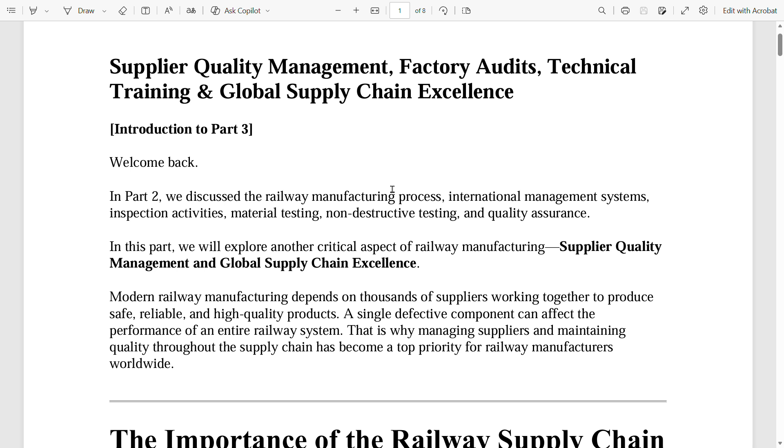Welcome back. In part 2, we discussed the railway manufacturing process, international management systems, inspection activities, material testing, NDT, and quality assurance. In this part, we will explore another critical aspect of railway manufacturing: supplier quality management and global supply chain excellence.

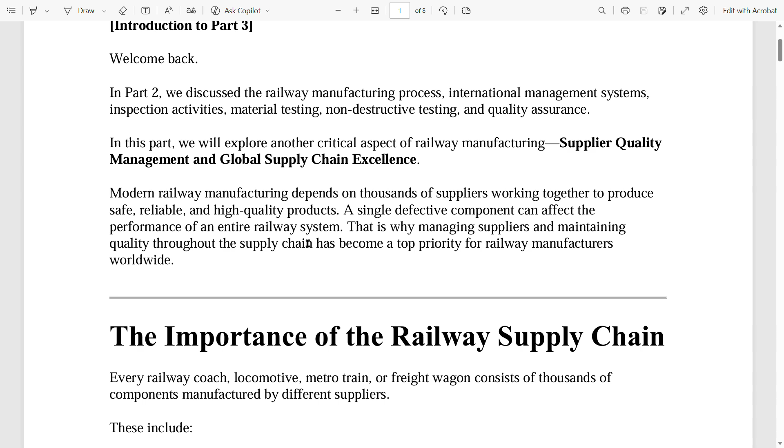Modern railway manufacturing depends on thousands of suppliers working together to produce safe, reliable, and high quality products. A single defective component can affect the performance of an entire railway system. That is why managing suppliers and maintaining quality through the supply chain has become a top priority for railway manufacturers worldwide.

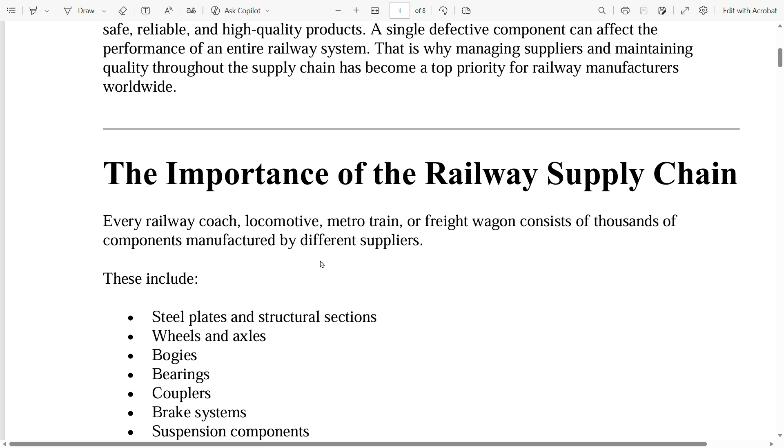The importance of the railway supply chain. Every railway coach, locomotive, metro train, or freight wagon consists of thousands of components manufactured by different suppliers.

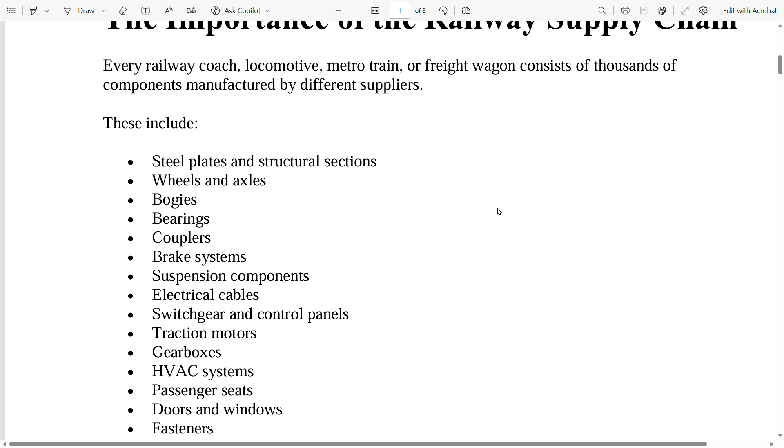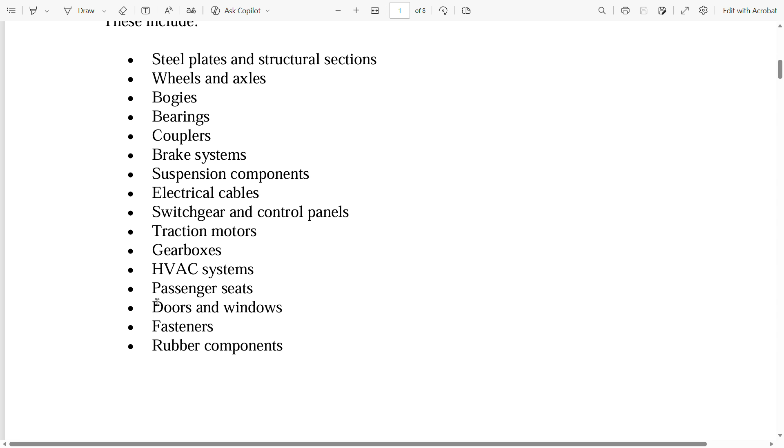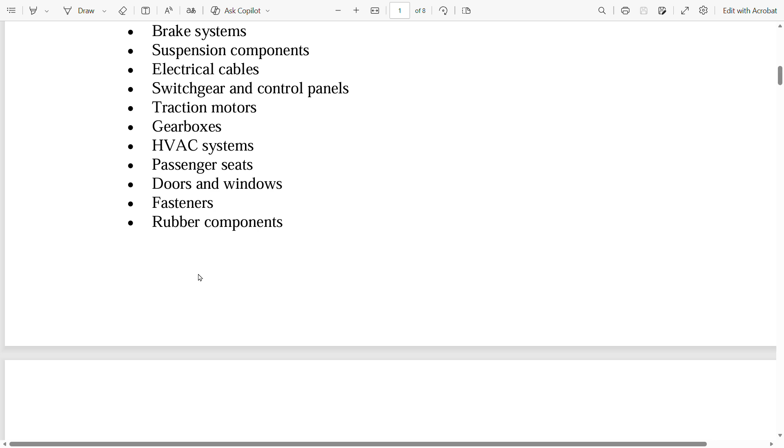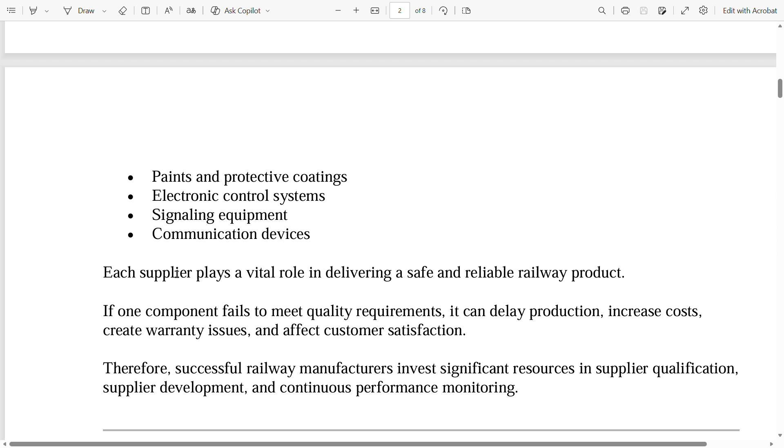These include steel plates and structural sections, wheels and axles, bogies, bearings, couplers, brake systems, suspension components, electrical cables, switch gear and control panels, traction motors, gearboxes, HVAC systems, passenger seats, doors and windows, fasteners, rubber components, paints and protective coatings, electronic control systems, signaling equipment, and communication devices. Each supplier plays a vital role in delivering a safe and reliable railway product.

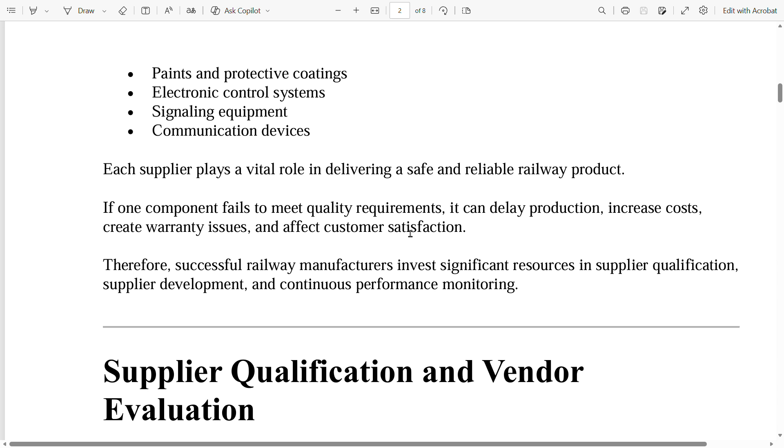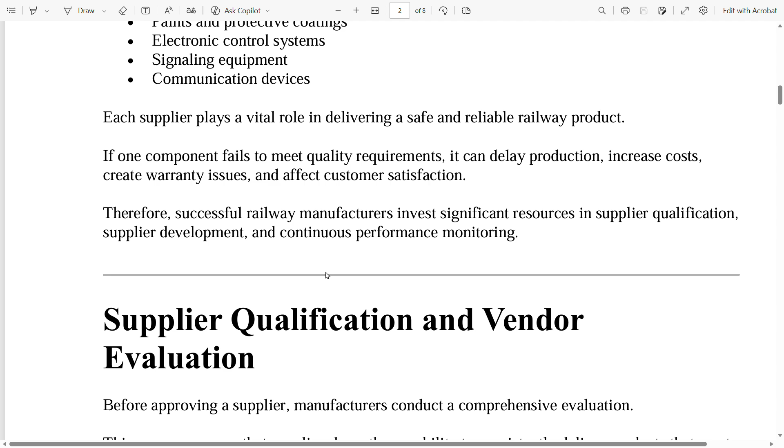If one component fails to meet quality requirements, it can delay production, increase costs, create warranty issues, and affect customer satisfaction. Therefore, successful railway manufacturers invest significant resources in supplier qualification, supplier development, and continuous performance monitoring.

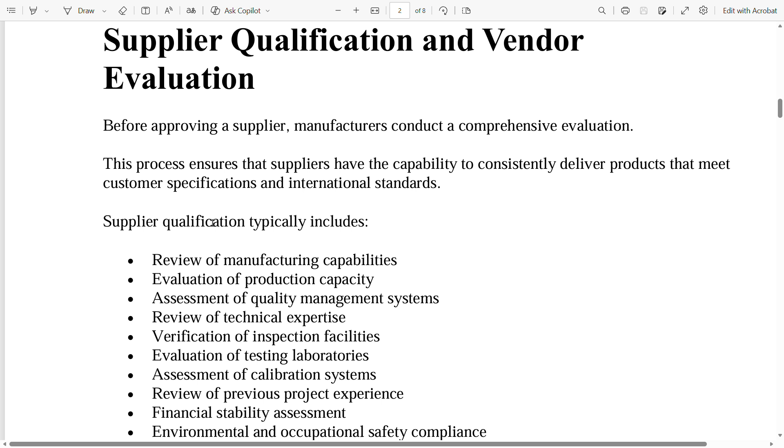Supplier qualification and vendor evaluation. Before approving a supplier, manufacturers conduct a comprehensive evaluation. This process ensures that suppliers have the ability to consistently deliver products that meet customer specifications and international standards.

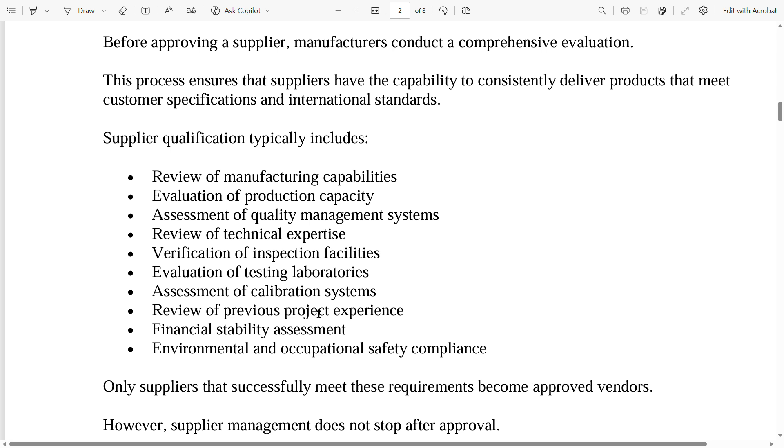Supplier qualification typically includes review of manufacturing capabilities, evaluation of production capacity, assessment of quality management systems, review of technical expertise, verification of inspection facilities, evaluation of testing laboratories, assessment of calibration systems, review of previous project experience, financial stability assessment, and environmental and occupational safety compliance.

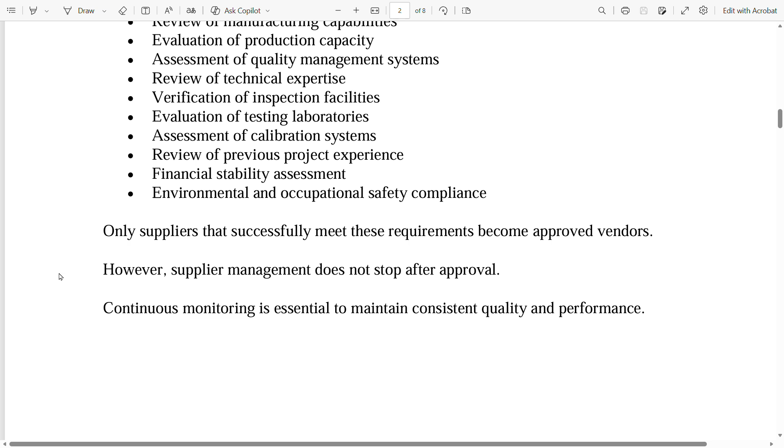Only suppliers that successfully meet these requirements become approved vendors. However, supplier management does not stop after approval. Continuous monitoring is essential to maintain consistent quality and performance.

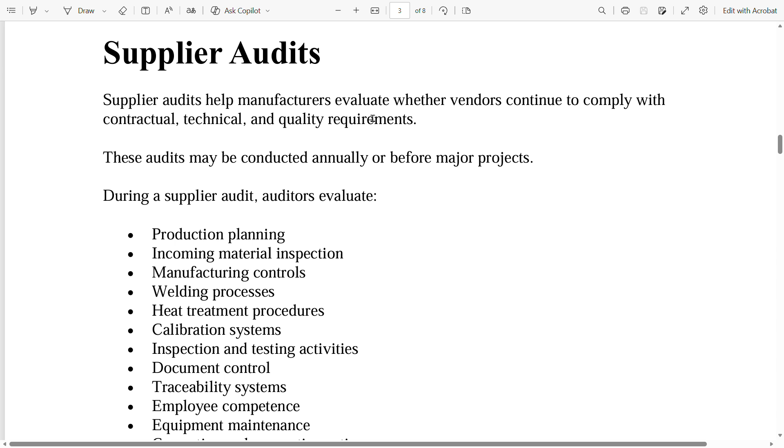Supplier audits help manufacturers evaluate whether vendors continue to comply with contractual, technical, and quality requirements. These audits may be conducted annually or before major projects.

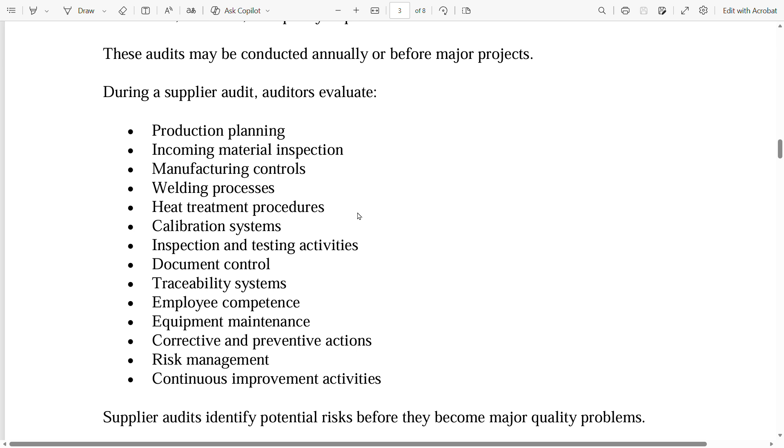During a supplier audit, auditors evaluate production planning, incoming material inspection, manufacturing controls, welding process, heat treatment procedures, calibration systems, inspection and testing activities, document control, traceability systems, employee competence, equipment maintenance, corrective and preventive actions, risk management, and continuous improvement activities.

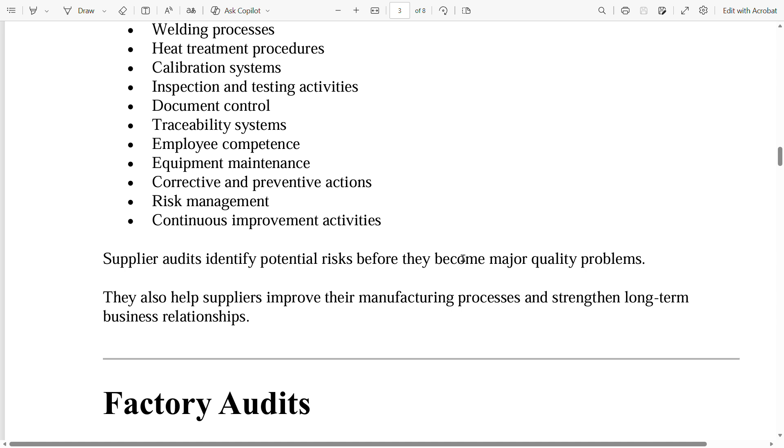Supplier audits identify potential risks before they become major quality problems. They also help suppliers improve their manufacturing processes and strengthen long-term business relationships.

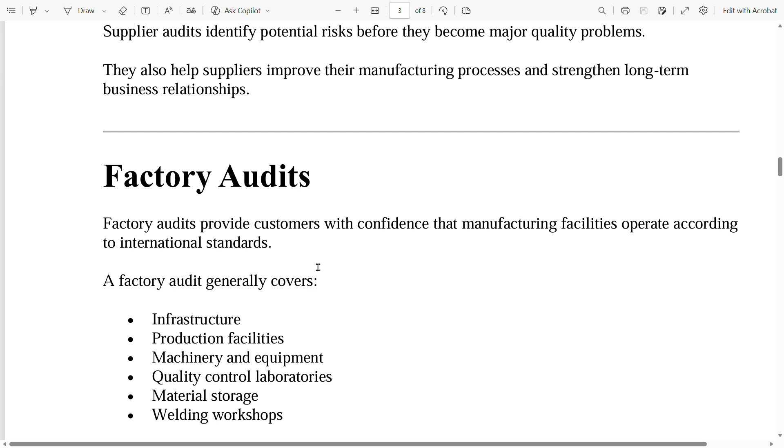Factory audits provide customers with confidence that manufacturing facilities operate according to international standards. A factory audit generally covers infrastructure,

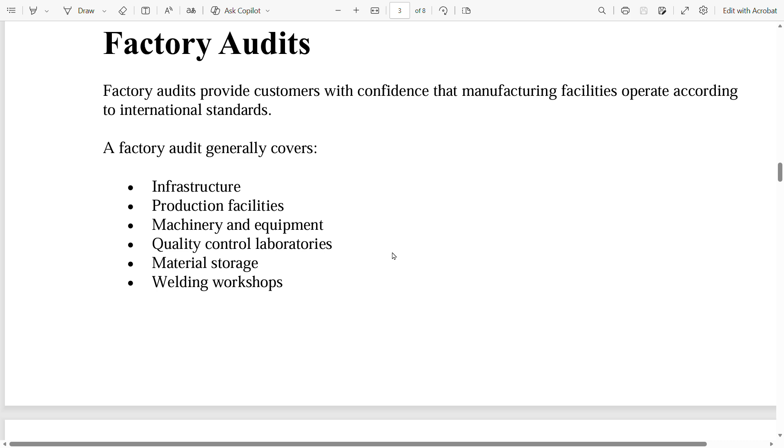production facilities, machinery and equipment, quality control laboratories, material storage, welding workshops, assembly lines, environmental controls, occupational health and safety, inspection equipment, calibration systems, documentation, and production records. Factory audits help identify opportunities for operational improvement while ensuring compliance with customer expectations.

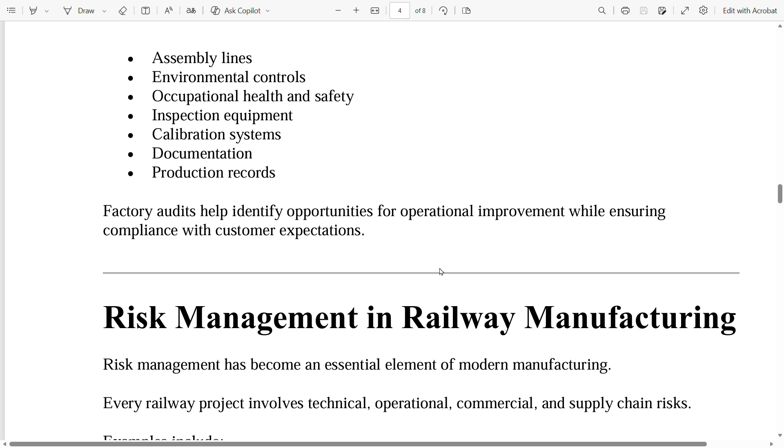Risk management in railway manufacturing. Risk management has become an essential element of modern manufacturing. Every railway project involves technical, operational, commercial, and supply chain risks.

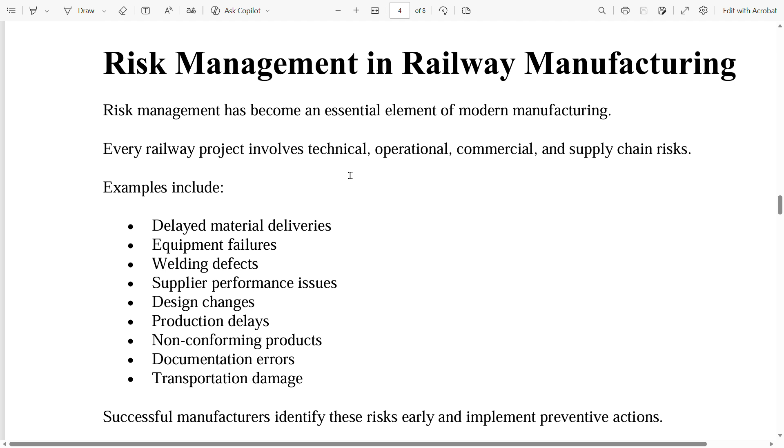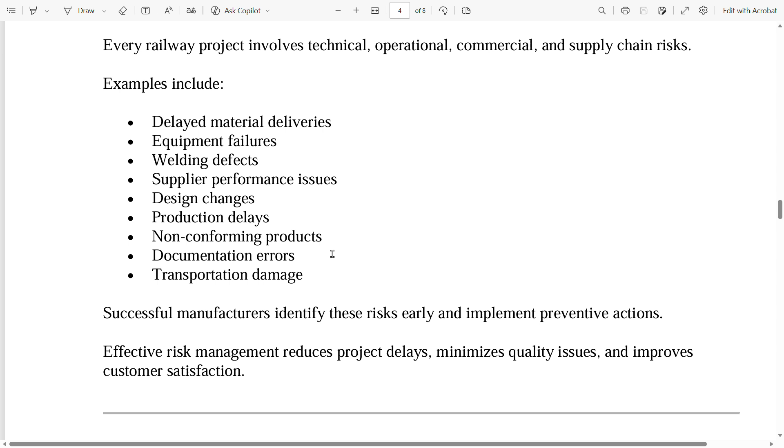Examples include delayed material deliveries, equipment failures, welding defects, supplier performance issues, design changes, production delays, non-conforming products, documentation errors, and transportation damage. Successful manufacturers identify these risks early and implement preventive actions. Effective risk management reduces project delays, minimizes quality issues, and improves customer satisfaction.

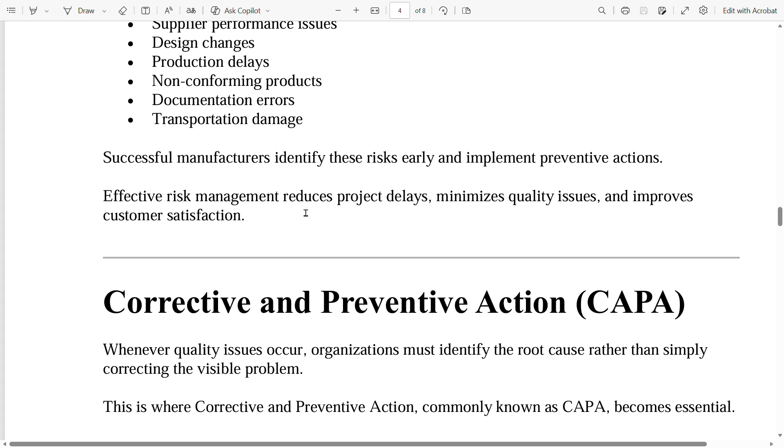Corrective and preventive action, CAPA. When quality issues occur, organizations must identify the root cause rather than simply correcting the visible problem. This is where corrective and preventive action, commonly known as CAPA, becomes essential.

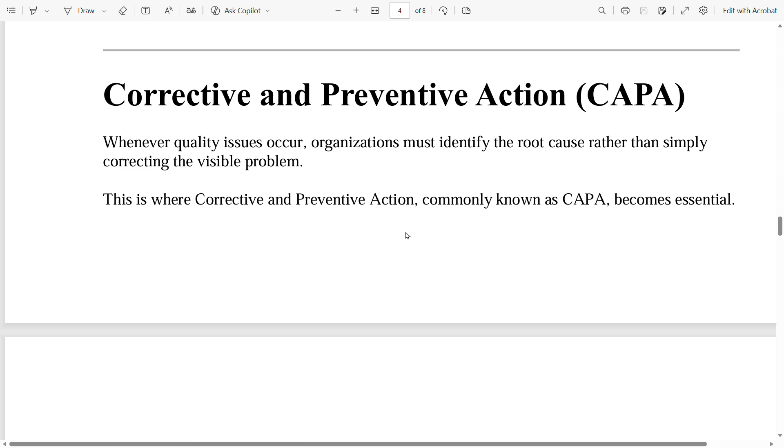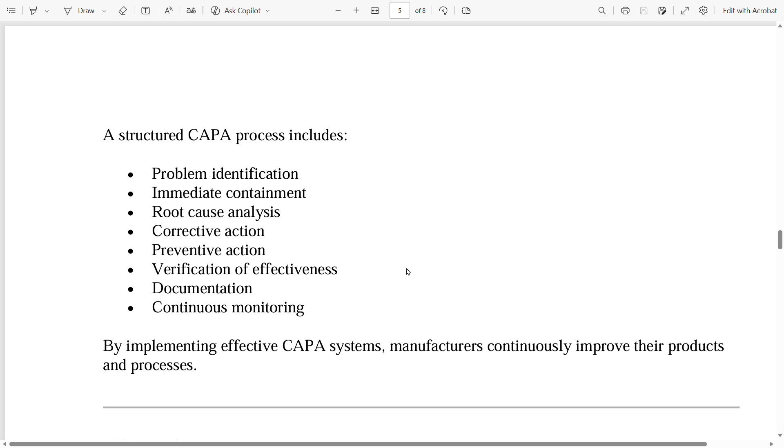A structured CAPA process includes problem identification, immediate containment, root cause analysis, corrective actions, preventive actions, verification of effectiveness, documentation, and continuous monitoring. By implementing effective CAPA systems, manufacturers continuously improve their products and processes.

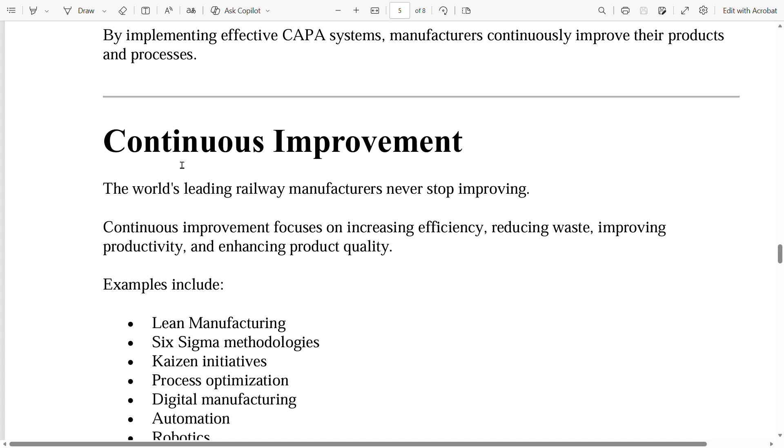Next is continuous improvement. The world's leading railway manufacturers never stop improving. Continuous improvement focuses on increasing efficiency, reducing waste, improving productivity, and enhancing product quality.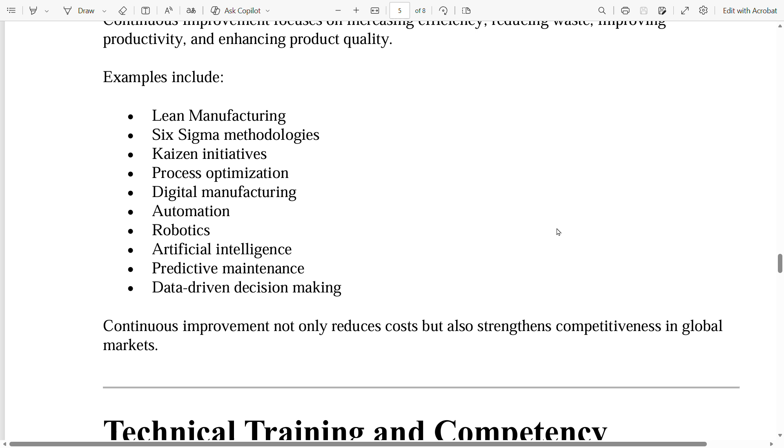Examples include lean manufacturing, Six Sigma methodologies, Kaizen initiatives, process optimization, digital manufacturing, automation, robotics, artificial intelligence, predictive maintenance, and data-driven decision making. Continuous improvement not only reduces costs but also strengthens competitiveness in global markets.

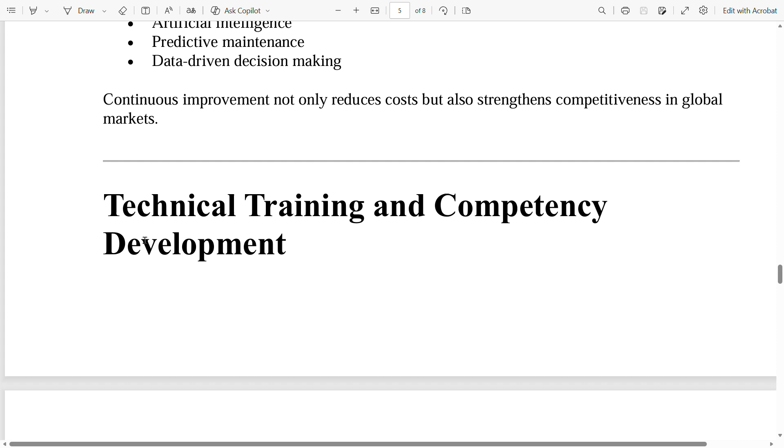Technical training and competency development. Technology in the railway industry continues to evolve rapidly. Employees must regularly update their knowledge and technical skills. Professional training helps engineers, inspectors, supervisors, auditors, and technicians stay current with industry standards and best practices.

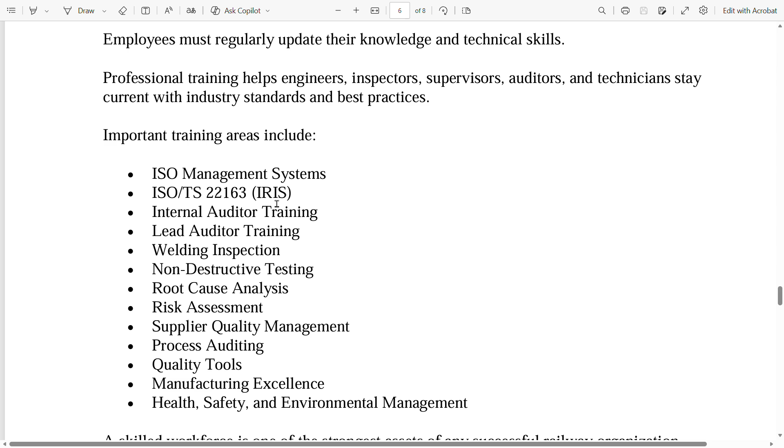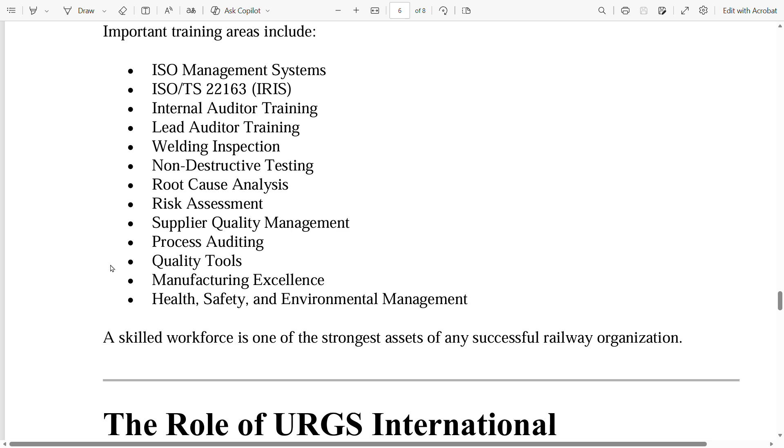Important training areas include ISO management systems, ISO/TS 22163, IRIS, internal auditor training, lead auditor training, welding inspection, non-destructive testing, root cause analysis, risk assessment, supplier quality management, process auditing, quality tools, manufacturing excellence, and health, safety, and environmental management. A skilled workforce is one of the strongest assets of any successful railway organization.

The role of URGS International Certification and Inspection Private Limited. We understand the challenges faced by railway manufacturers, EPC contractors, OEMs, component suppliers, and global supply chain partners. Our experienced team works with organizations to strengthen quality systems, improve operational performance, and ensure compliance with international standards.

Our services include ISO 9001 Quality Management System Certification Support, ISO 14001 Environmental Management System Support, ISO 45001 Occupational Health and Safety Management System Support, and ISO/TS 22163 IRIS Management System Support.

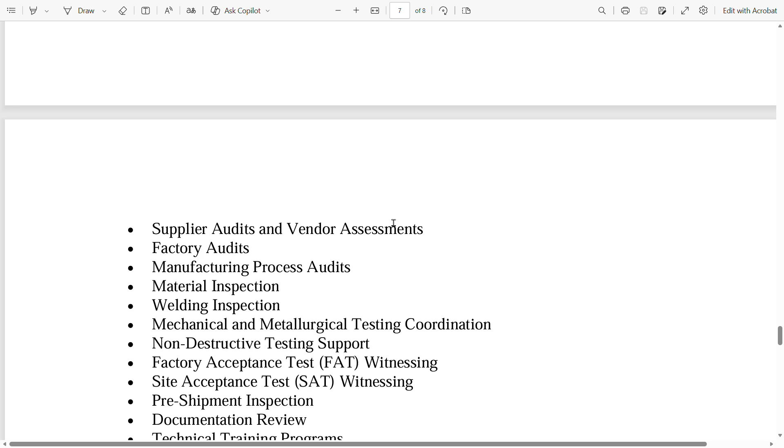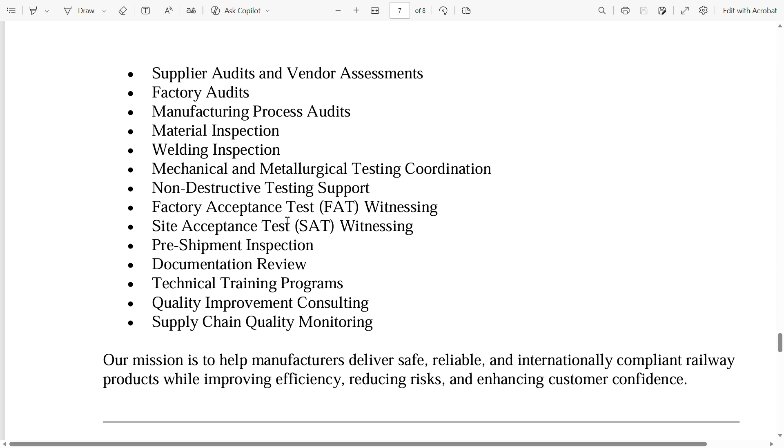Third-party inspection services, supplier audits and vendor assessments, factory audits, manufacturing process audits, material inspection, welding inspection, mechanical and metallurgical testing coordination, non-destructive testing support, factory acceptance test (FAT) witnessing, site acceptance test (SAT) witnessing, pre-shipment inspection, documentation review, technical training programs, quality improvement consulting,

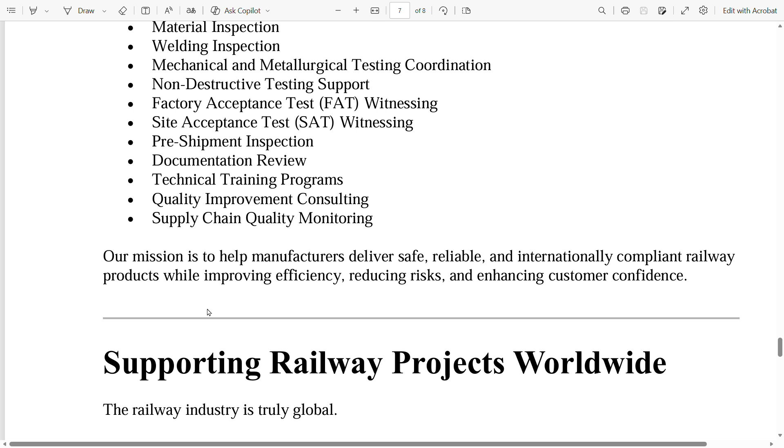and supply chain quality monitoring. Our mission is to help manufacturers deliver safe, reliable, and internationally compliant railway products while improving efficiency, reducing risks, and enhancing customer confidence.

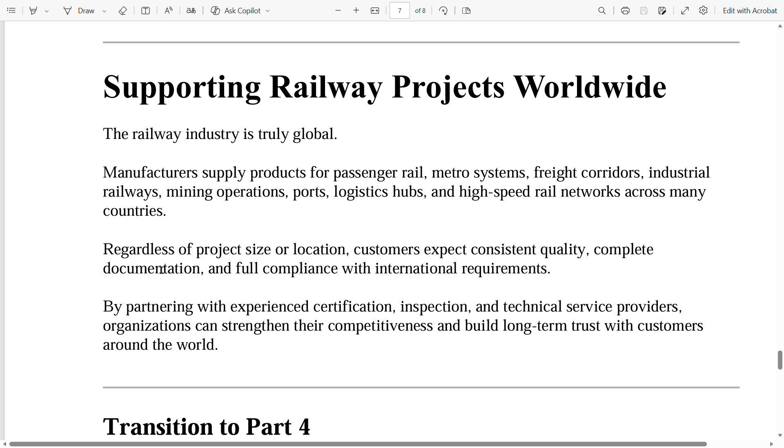Supporting railway projects worldwide. The railway industry is truly global. Manufacturers supply products for passenger rail, metro systems, freight corridors, industrial railways, mining operations, ports, logistics hubs, and high-speed rail networks across many countries. Regardless of project size or location, customers expect consistent quality, complete documentation, and full compliance with international requirements.

By partnering with experienced certification, inspection, and technical service providers, organizations can strengthen their competitiveness and build long-term trust with customers around the world.

Transition to part 4. In the final part of this series, we will discuss the future of railway manufacturing, digital transformation, sustainability, smart manufacturing, emerging technologies, and how organizations can prepare for the next generation of railway engineering. We will conclude with key recommendations and a final message on why quality, compliance, and continuous improvement are essential for long-term success in the global railway industry.